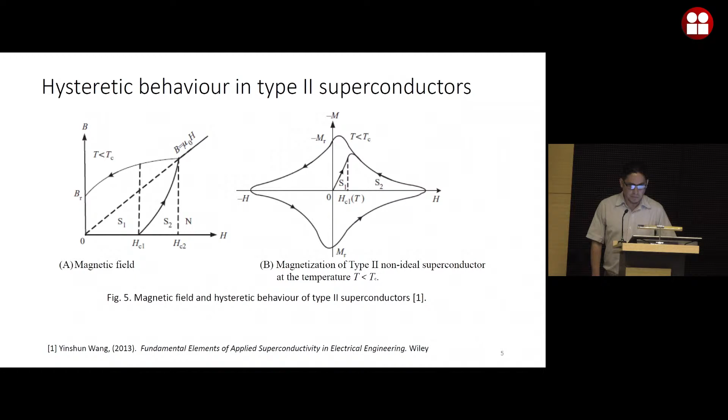You can talk, I think. It should work. Thank you, thank you.

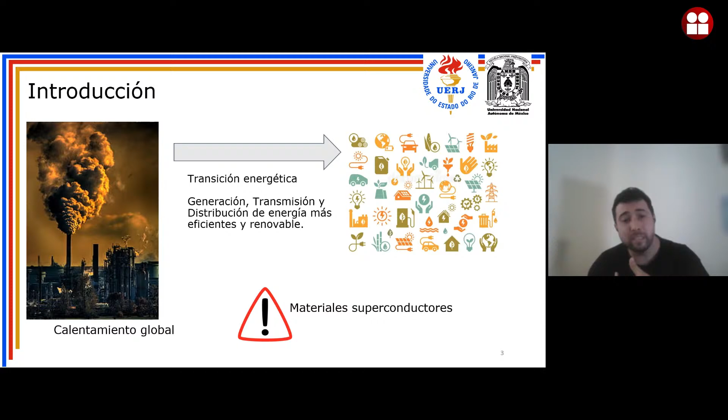Okay, so talking about global warming, we need to find some solutions to avoid these increases in temperature over the years. Including here in Brazil, we have experienced the highest temperatures in several years, so it's real, and we need to care about that. Our way to do that is the energy transition, and this energy transition is about the generation, transmission, and distribution systems, which we need to make more efficient and renewable. And here we insert superconducting materials as a potential solution to help this scenario. So we need to model them for these kinds of applications.

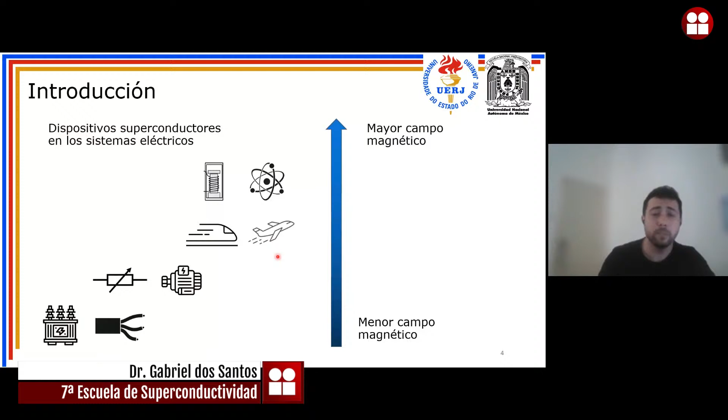For example, we can see some applications here: superconducting fault current limiters, transformers, cables, superconducting motors and generators, trains, aviation, superconducting magnetic systems, and fusion. In all of these systems we can implement superconducting materials in some parts of the device.

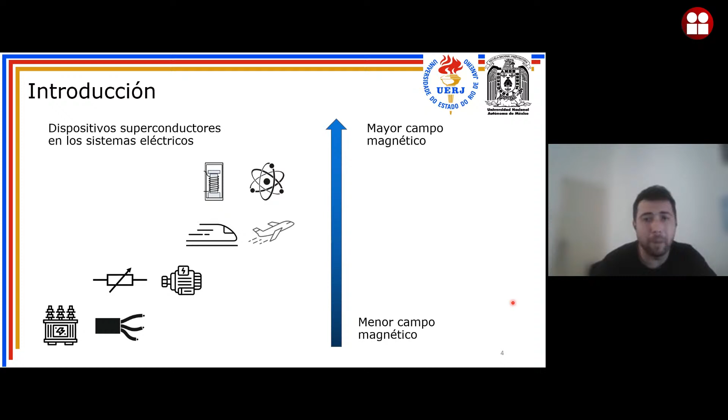And of course we have here a range of these superconducting applications in terms of the magnetic field, as we can see here. And the question is, how can we implement this kind of superconducting material? It has a very non-linear resistivity: it depends on the magnetic field, it depends on the temperature, and it depends on the current that we apply.

So the question is, how can we work with these materials, or how can we model these materials with their several nonlinearities and dependences? We have a solution here: solve this problem using the finite element method, moment method, finite difference methods and so on. It means the numerical methods that we can use to solve this problem and to design this kind of equipment.

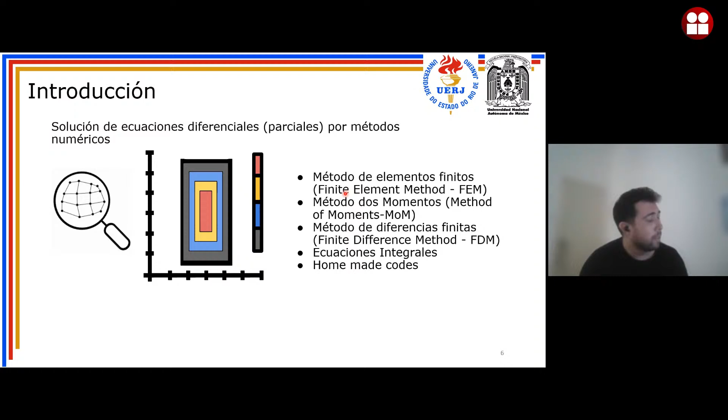So this kind of equipment needs to be simulated in some formulations. As the last presentations told us, we need to solve, for example, the A-V formulation, the H formulation. We can use the H-V formulation, H-A formulation, and so on. Here in this presentation, I will focus on the J-A formulation, a very recent formulation that was developed.

So here we are in the J-A formulation. The J-A formulation was proposed by me, by Professor Barbara, who works with me in the same university, by Professor Felipe Sass, Professor Flávio Martins, Guilherme Sotelo, and Rubens Andrade Jr.

In this formulation, we look at a low frequency system, and we solve a partial differential equation and an ordinary differential equation. Both these equations we can solve separately. It is important that we solve them separately. It's not the same system. It's two systems of equations that we need to solve simultaneously.

So we will solve here the magnetic vector potential, that is the state variable of the A formulation, that has as a source the current density. And for the J formulation, we have the current density as a state variable and the magnetic vector potential as a source. And we solve the ordinary differential equation.

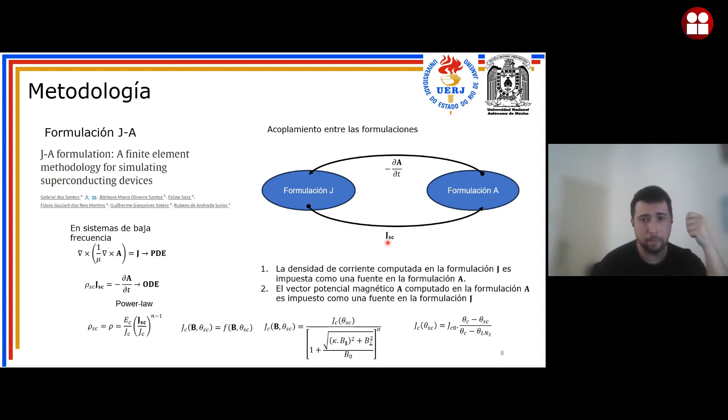And what about the coupling between these two formulations? We compute in the J formulation the current density. And this current density is imposed as a source in the A formulation. And we solve the A formulation and enforce the magnetic vector potential, better speaking, the time variation of the magnetic vector potential, in the J formulation. And so we make this enforcement in these two formulations, coupling them, okay?

And so as we know now how to model the J-A formulation, we could think how to impose or compute the induced current in some superconducting domain. So, for example, if we would like to impose a current in this domain here, omega SC, of course it's a 2D simulation, how could we do that?

So, in this case, we will integrate the current density through this domain and apply an integral restriction here. That means this integration minus the current that we would like to impose equals 0. And of course, we can make choices in several parts of this implementation. For example, we can choose to use or not a Lagrange multiplier. It's not needed, but we can choose it to help improve this method.

But the methodology to enforce the current is just to integrate the current density in the domain where you would like to enforce the current, minus the current that you would like to impose, equal to 0. We will see how to implement it in COMSOL as well.

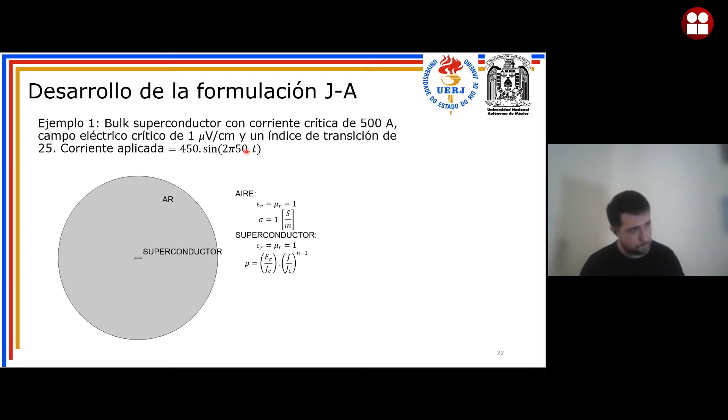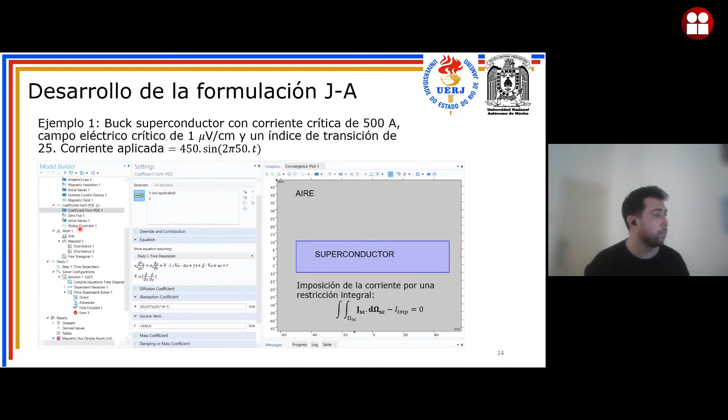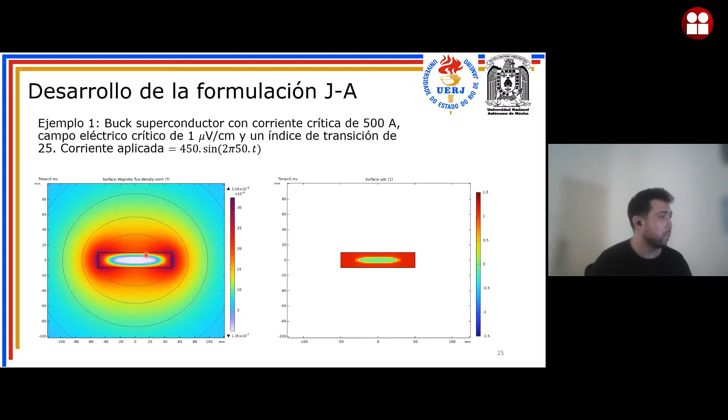in the last slides. We have the first results where we can see that the magnetic field and the current density show us the correct results as we expected for a superconductor. It means that the current in the superconductor has a correct form, as well as the magnetic flux density.

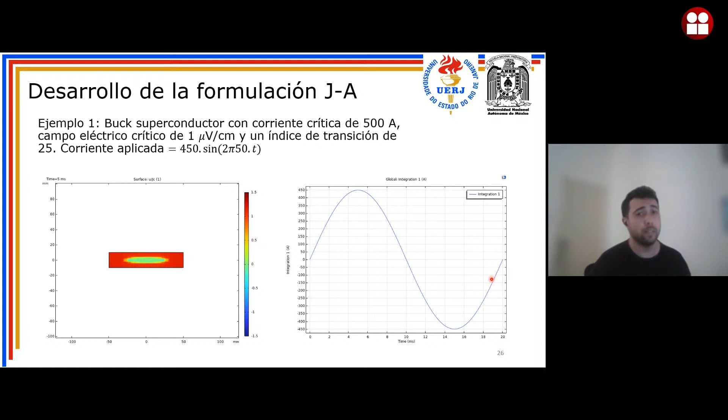And to check if the imposition of the current is correct, I integrate in another way this superconductor domain just to check if my imposition of the current is correct. And as we can see here, it's correct.

Now, computing the same problem with the same characteristics, just now imposing a magnetic field in the y direction, let's see the computation of the induction of the currents in the superconducting domain. We use here, of course, the Dirichlet boundary condition to impose the magnetic field in the boundary here.

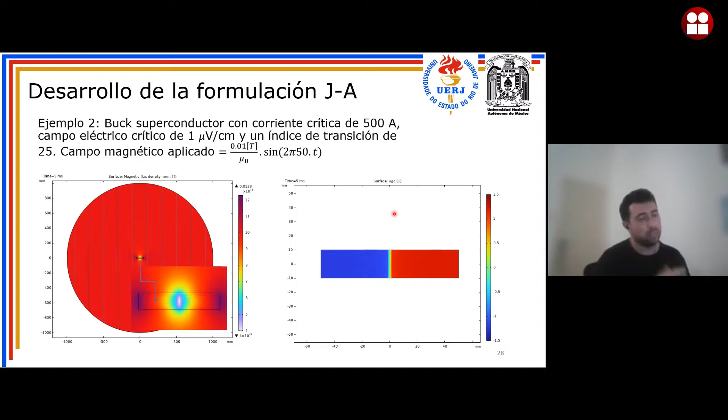And so, as we can see here, the superconductor has a correct current density. The current is inside of the plane and outside of the plane. It indicates a circulation of the currents to avoid the penetration of the magnetic field inside the superconductor. Of course, in this case, as this value of the magnetic field was so high, the current penetrated a lot in the superconducting domain.

Now, I would like just to emphasize the two publications that I could see in the literature about the J-A formulation. The first publication was done by me, Barbara, Felipe, Flávio, Guilherme, and Professor Rubens, and a very nice publication as well, the numerical calculation of a high temperature superconductor with J-A formulation that was developed by Silhan Wang et al. It was also published in 2023.

So, as a conclusion, here was presented a new formulation, and this formulation has a high potential to accelerate the computation times, including considering ferromagnetic materials. There are open opportunities to implement MgB2 problems in J-A formulation and also to contribute in the homogenized method approximation. I also would like to see some implementations in this field. As I told you, this formulation gives a possibility to implement superconducting ferromagnetic materials and so on.

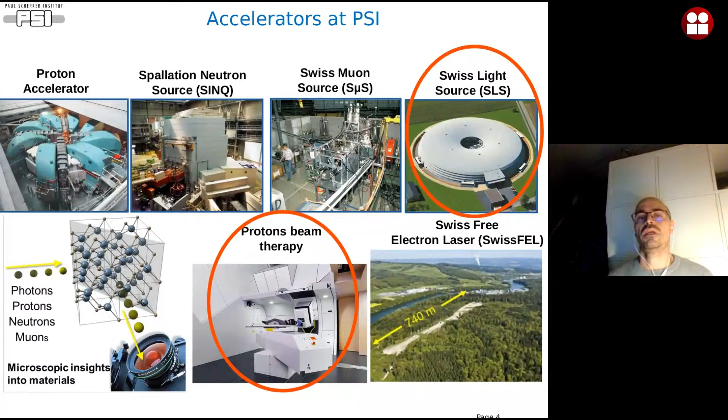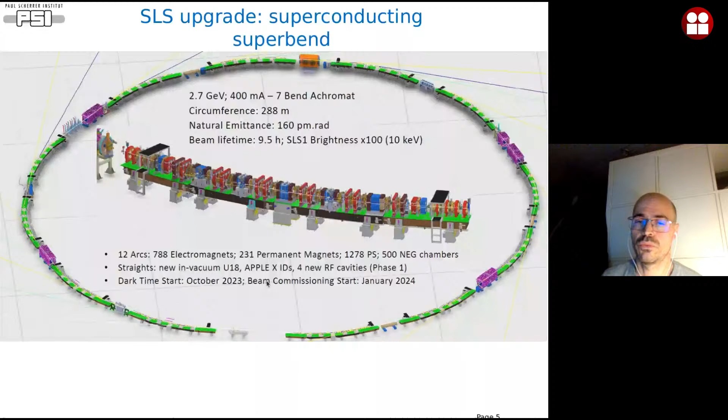So I start with the upgrade of the Swiss Light Source, our electron accelerator at PSI. For this upgrade, we need to replace all the storage ring, and we needed to design, build and measure more than 1,000 magnets, including resistive electromagnets, permanent magnets, and 2 superconducting magnets. Here is just an overview of our zoo of magnets.

On the top row we have permanent magnets. You can see an example of a dipole. This is a combined function, dipole and quadrupole. This is a so-called superbend, which is a dipole with a longitudinal gradient, which will be used in our storage ring to produce hard X-rays. A quadrupole made with permanent magnets, and then here you can see classical resistive magnets. A quadrupole, a sextupole, and this is an octupole by itself, but actually we use it as a combined function octupole, quadrupole, and skew quadrupole.

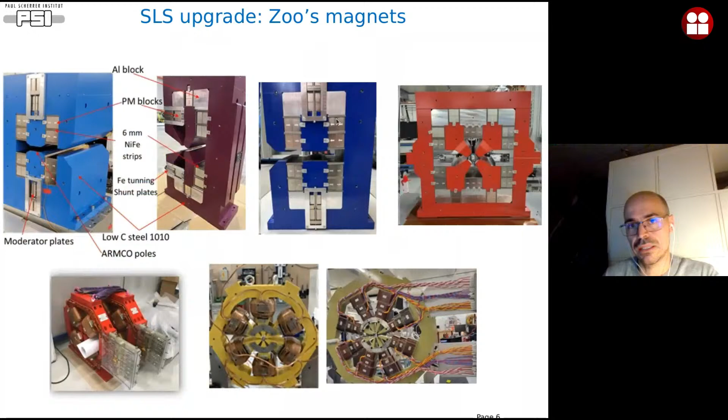That has to be a cryogen-free or almost cryogen-free magnet, because it was not convenient to build an infrastructure to have liquid helium and liquid nitrogen for the screen flowing all around the tunnel just for 2 magnets. So it's a magnet that relies on cryocoolers. This will be used for phase 2 of our project, but this magnet is already in production.

Whereas when you irradiate with electrons or with photons, with X-rays, the peak of the dose is actually at the surface of the patient himself or herself. Proton therapy has a lot of advantages, especially in the case of kids, where surrounding tissues are more delicate and where the risk of secondary tumors is higher.

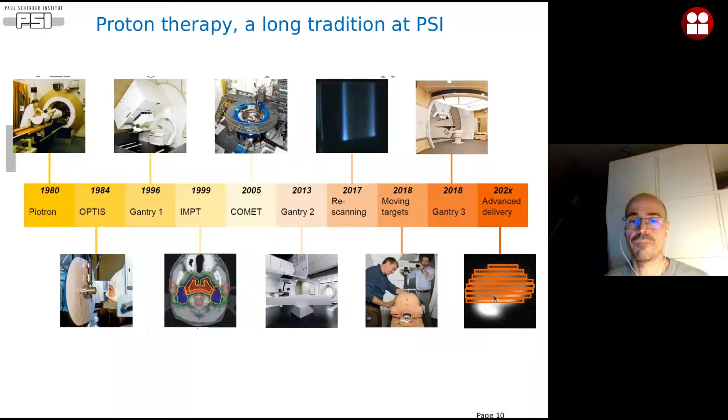Then in the early 2000s we got a dedicated superconducting cyclotron for the proton beam lines. And in the first decades of the 2000s we got our main machine, which is Gantry 2, and we really developed this rescanning technique, which allows us to scan the tumor and deposit the energy exactly where you want, and also to repaint, so to redeposit energy if the required dose to kill the tumor exceeds certain thresholds.

I want to point out, in terms of pioneering projects, that already in 1980 there was this project that was not built, but it was still nice to conceive. It was a machine called the Piotron, already involving superconducting coils. Here there was a set of superconducting coils based on niobium-titanium to confine the pions, and here was the bed with the patient.

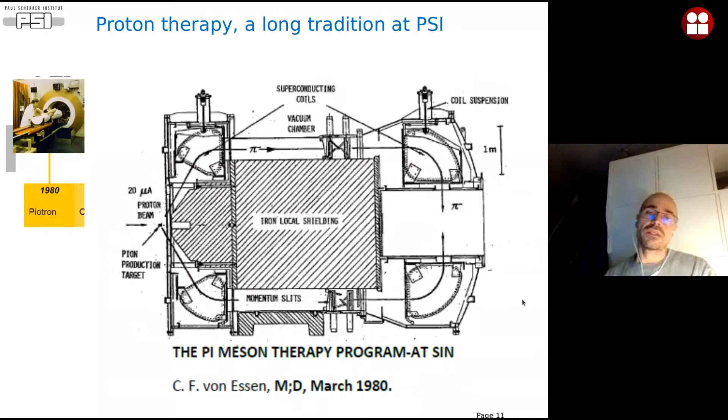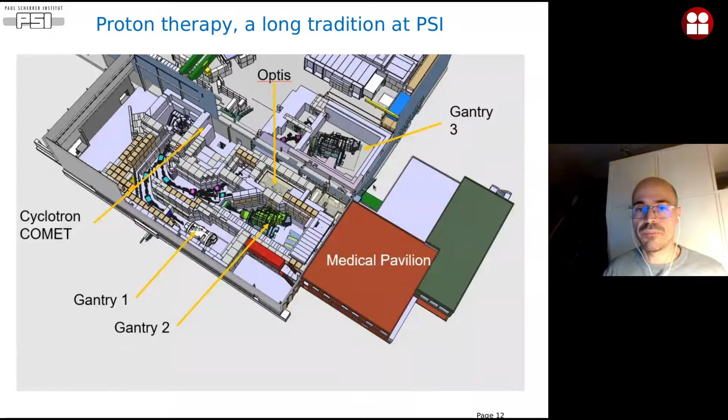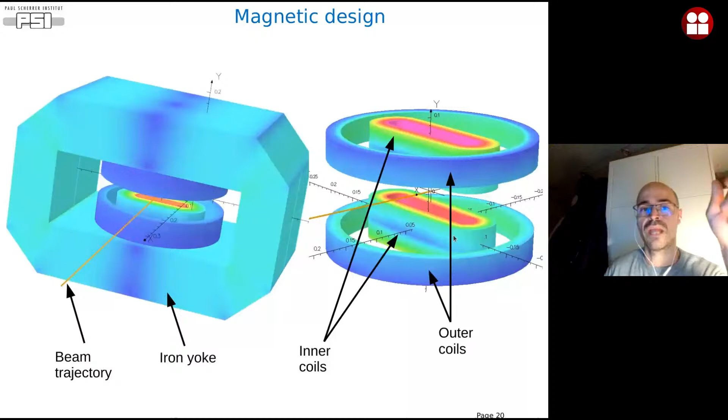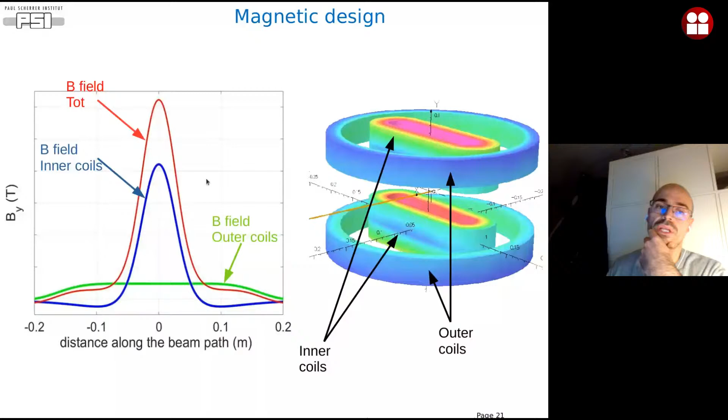You have a set of basically two solenoids outside just to guarantee the field integral that you need, and then actually you have two racetracks inside to boost the field and to produce a peak like that. So here you can see basically the background field produced by the outer coils, the outer solenoids, and then here in blue you can see the field produced by the racetrack, which is actually the peak field that you need to produce hard X-rays in the storage ring.

As I told you, the beam physicists told us that they require the tunability. So actually, you can change the current setting in the coils in order to have different peak fields by keeping this field integral always constant. And this had some implications, especially for the thermal design, because of course to have the possibility to tune the current in the racetrack and in the solenoid, you need two power supplies, you need two sets of current leads, so you have a bit more thermal input.

Challenges when we deal with magnets that have to stay in a storage ring with another 1,000 magnets in the same ring: it's of course the crosstalk. So actually it was quite a big part of the magnetic design, the study of the leaking field or the stray field of this magnet. We were also studying a different configuration for this, like an H-frame or a C-shaped magnet, and of course mechanical

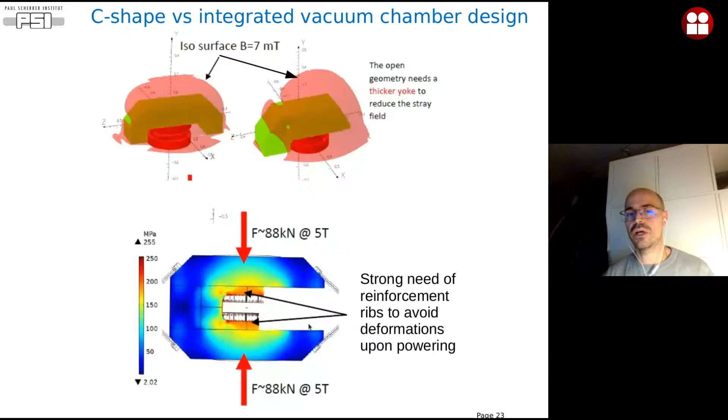stability, because at the end we are sensitive to mechanical errors. So if these forces would actually tilt the coils too much, you would introduce harmonics in your field which then you cannot correct in the storage ring, and so at the end the optics of your storage ring won't work. We did analysis to check the impact of the roll, yaw, and pitch angle on the magnetic field, because in reality we will have alignment errors, which didn't show, let's say, showstoppers in this phase here.

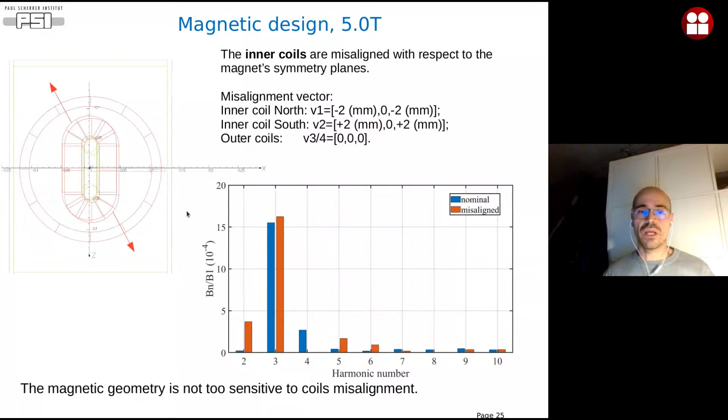Also, we analyzed the problem of misalignments of the coils, because again we had to deal with mechanical tolerances in a mechanical assembly. And also here, by studying the harmonic contents, we saw that indeed we are not so sensitive to these coil misalignments.

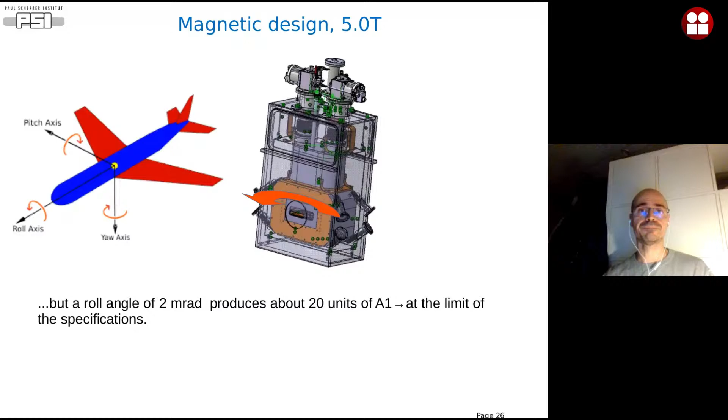But the challenge is really in the suspension straps here, because if we have a small roll angle here, we are talking about basically 2 millirad, this 2 millirad translates into 20 units of A1. A1 means a skew dipole. So the normal dipole is going vertically in this direction. The skew dipole is orthogonal to that, and this is basically at the limit of what we can correct in the machine. So just to give you an idea about the tolerances that we have to achieve in the storage ring.

As I told you, the crosstalk is actually an issue, it's a challenge. When we design every magnet, also the resistive and the permanent magnets, we cannot design the magnet one by one as a standalone magnet. We have basically to check the impact of the neighboring magnets.

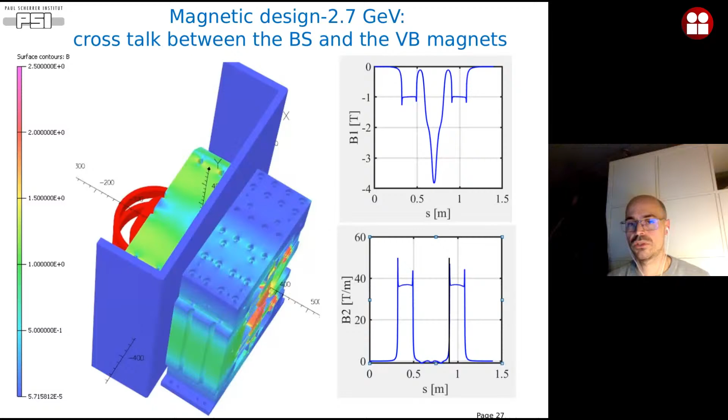So in this case, you can see a magnetic model of the superconducting superbend, including also the cryostat walls. And here is actually a permanent magnet, which is a combined function dipole and quadrupole. So this is the profile of the B1, the dipole component along the beam path, and the B2, the quadrupole component along the beam path. So just to say, in this particular case of the storage ring, the crosstalk is an issue, and whenever you design a magnet, you need to take into account also the neighboring magnets.

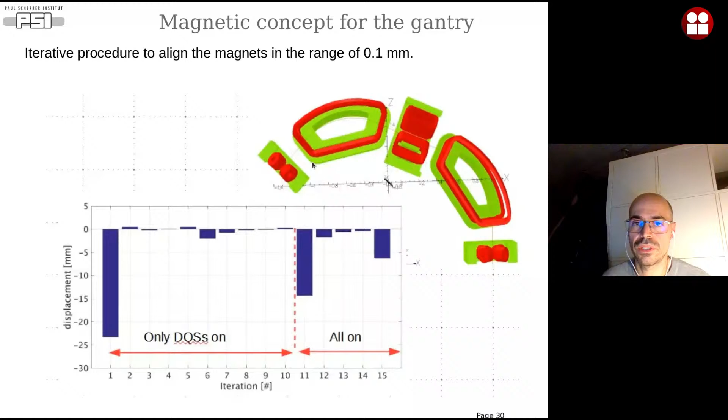So you need to change the field of your magnets, and you have to be quick, because on the other side of the magnet the patient is waiting, and the treatment itself cannot last long. Also because sometimes we have moving tumors, because the patients have to breathe, and there is the heartbeat. The tumors are not really static objects, so you have to change the field quickly. And so there is the problem of designing a magnet to minimize the AC losses.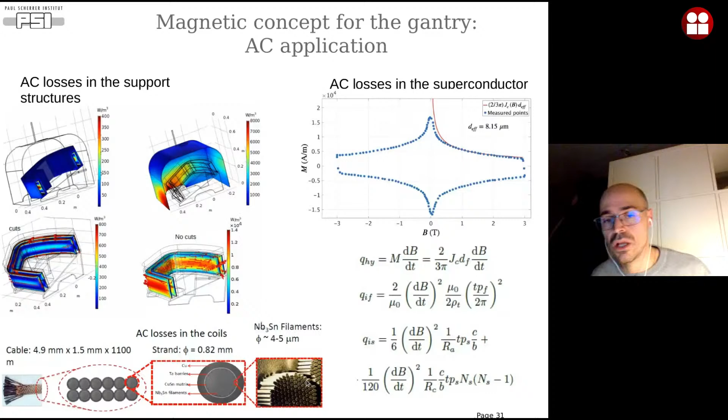And if you look inside a cable, you have interstrand losses. When you ramp the field up and down, the current flows between the strands. Inside the single strands, the current also flows among the filaments, so you have interfilament coupling losses. So it's really a multi-scale problem, and you have to go from the losses in the big support structure to the interfilament losses inside the superconductor. All this will then have an impact on the thermal design.

We start, as before, with the superconducting superbend. In this case, the magnet is a steady-state magnet, so the problem of AC losses is really minimized, because you have to change field just when you turn on the magnet, and you can ramp the current very smoothly. Here you can see a schematic of the superbend. It relies on two cryocoolers for redundancy. The machine has to work with a reliability of almost 99.999%, and if the superbend fails, you have to shut down the whole storage ring. That's not acceptable, or we have to minimize this risk.

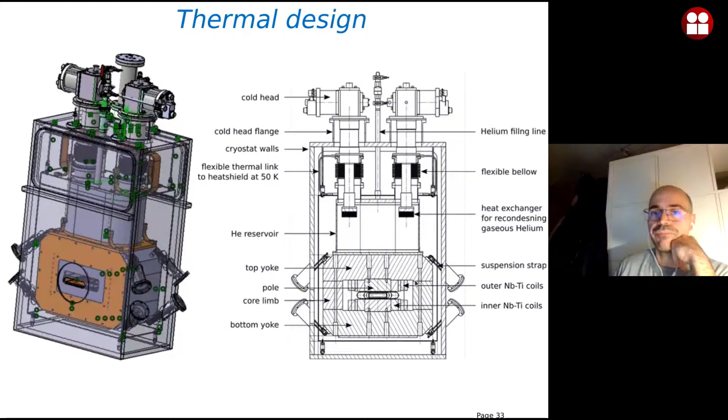In our previous design, we also had a helium reservoir with the idea of using the cryocoolers as recondensing units. This was also to get a better contact between the 4.2 Kelvin surface and the yoke. And then the coils located here are cooled by conduction. The challenge here was the design of the copper straps, so the thermal path between the cryocooler and the coils.

Basically, we are going to use two-stage cryocoolers, because we need to cool down the shield, because there is a thermal shield here which has to stay at 50-60 Kelvin, and then we have to cool down the cold mass, which has to stay at 4 Kelvin.

With our design, we can also cool down the magnet by pouring liquid helium in this reservoir, or directly by conduction, thanks to the cryocoolers, which otherwise work as a recondensing unit.

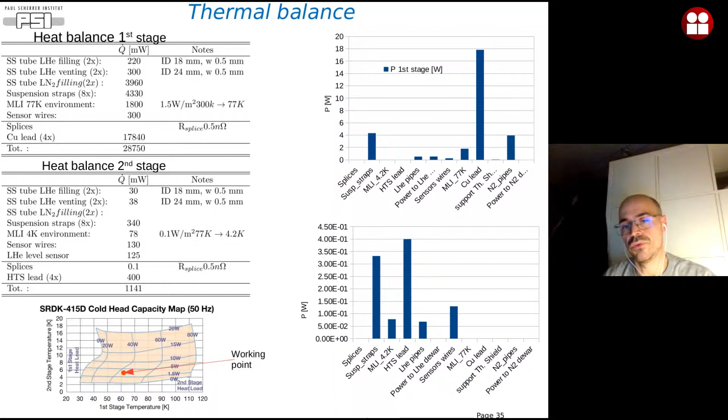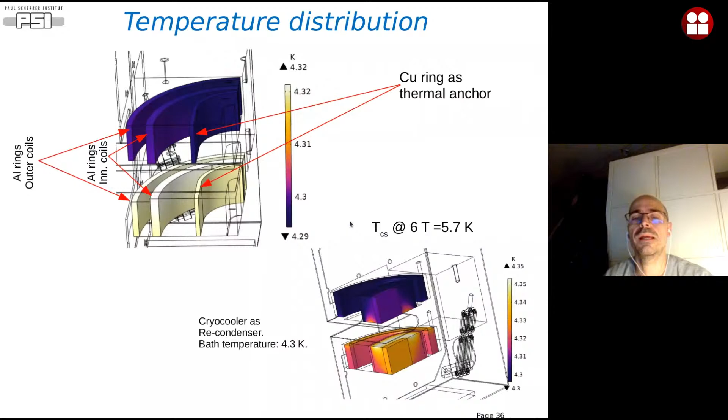We put quite an effort to design the thermomechanical structure around the coil. We needed a structure here to pre-compress the coils. And the point was also to try to use this structure as a heat path, so to have a homogeneous temperature distribution in the coils. So here you can see the aluminum ring which goes around the outer coil, the outer solenoid, and then this is the support structure of the racetrack inside.

And also, the challenge was to minimize the heat gradient in the shield and in the suspension straps. So these are the suspension straps which go from the cold mass to the cryostat. From here you have 300 Kelvin, and then here you have to stay at 4 Kelvin. So you have to minimize the heat load coming from the suspension strap.

And the main point here was to clamp the middle point of the suspension straps to the thermal screen around, just to intercept most of the heat coming from the 300 Kelvin environment.

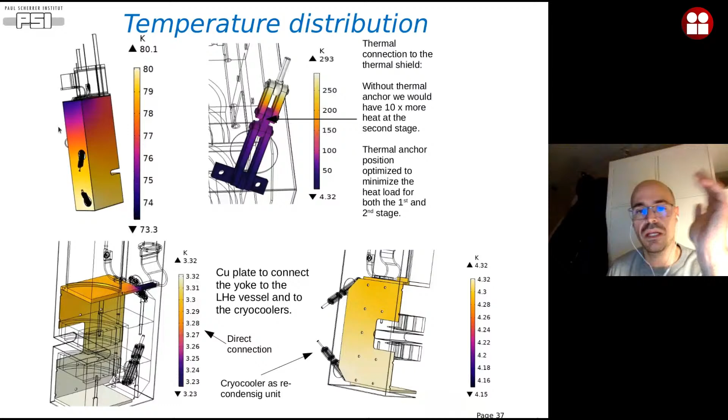If we switch back to the gantry, in the thermal design, a lot of problems were the same as for the superbend: minimizing heat load coming from the straps, the radiation from the screen and so on. But in the gantry, the additional challenge was the fact that we have to work in AC.

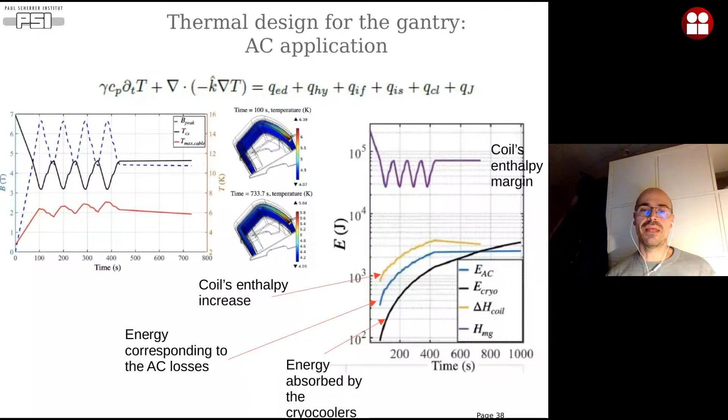And the field of this sweep actually was not decided by us, but it's an input that comes from the medical physicists that have to analyze how fast you need to sweep the field in order to treat the tumor. So how fast you need to scan the tumor in depth.

If we go to the mechanical design now, as I mentioned before, we try to use the mechanical structure also to distribute the heat in the coils. So the support structure of the SuperBend relies on pre-compression rings. For the outer solenoid, it's pretty simple. It's really a compression ring.

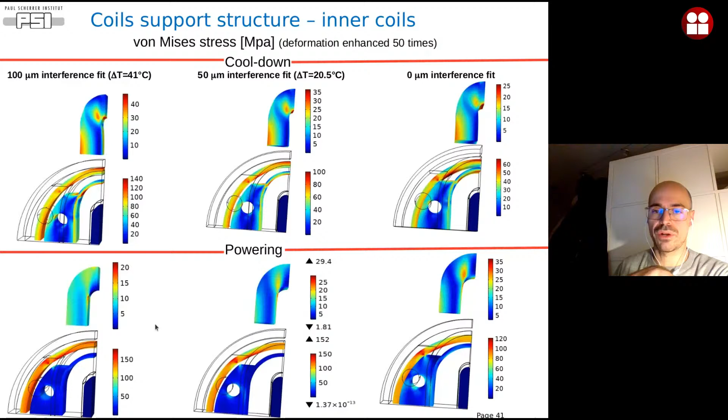The other point was to consider the full structure around the coils. For instance, we have to screw the pads, so it was important to consider the friction between the screws and the supports. The friction had to be minimized, because you want these pads to move when the aluminum ring around shrinks, and you don't want to lose much pre-compression as a consequence of this friction here.

All these problems are highly nonlinear, because you have to design the contacts between the various parts of the support structure. And in this particular case, I was using again COMSOL to make this multi-physics coupling between the magnetic design and the mechanical design.

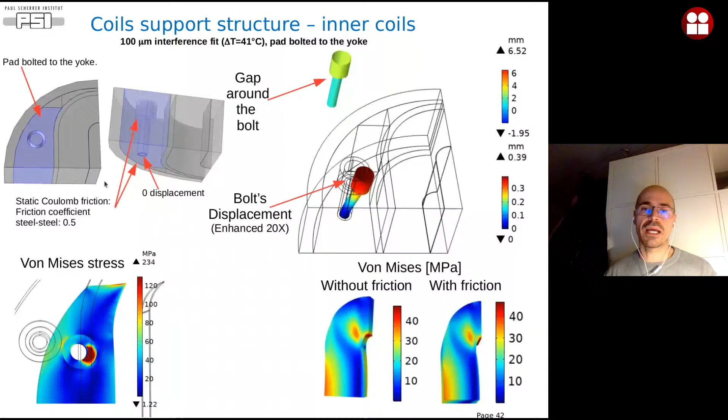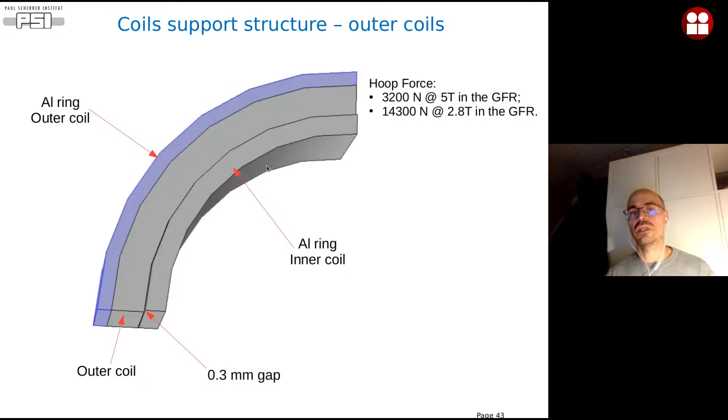Okay, for the external coil, the concept is the same, but it's actually easier because we just need an aluminum ring to pre-compress the inner coil. For solenoids, the design of the mechanical structure is usually much easier. So here you can see the same kind of calculation, just something to counteract the hoop stress action. The SuperBend is made with niobium-titanium, and niobium-titanium is not strain sensitive.

For the gantry magnet, the additional challenge was AC losses, as we said before, but we wanted to use Nb3Sn, because with niobium-titanium we didn't have enough margin. HTS at the time was too expensive, so we didn't select HTS. So Nb3Sn was the conductor of choice. The additional challenge is that Nb3Sn is brittle, and on top of that strain sensitive. So you have to make an effort to minimize the deformation, and you don't want to crack your strands inside the cable.

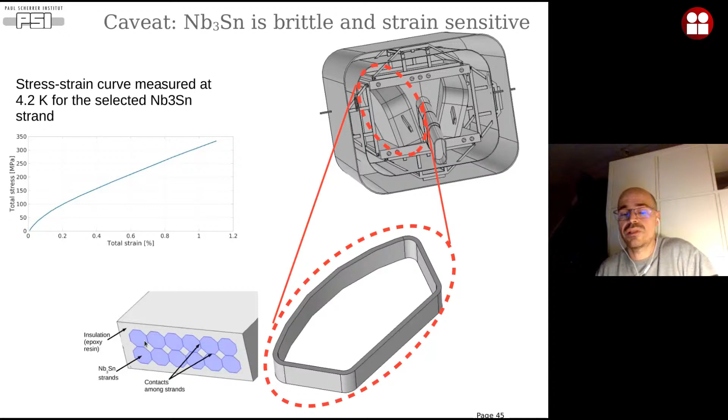For this magnet, we plan to use Rutherford cables. Here is a simplified cross-section. It was a small Rutherford cable made of 12 strands. And this is the stress-strain curve of one single strand, the curve that we use for the mechanical calculation to estimate the strain and then the stress inside the cable.

Also here, it was a multi-scale approach, starting from a homogenized model of the coil, going through a homogenized model of a cable inside the coil, to go to a twist pitch of the Rutherford cable inside the coil. The idea was to calculate the strain inside the strands, and then, using the behavior of Jc against the strain, you can estimate where you land here, and so you can estimate your quench margin.

Indeed, with the multi-scale approach, you can go also further, because if you select the strand where you have the peak stress, then you can go deeper into the analysis, and you can see actually what happened in the strand itself among the superconducting filaments. So this is basically the strand. This was the non-deformed configuration. Then you can see actually the real strain, or in this case the stress distribution in the superconductor, in this case Nb3Sn filaments.

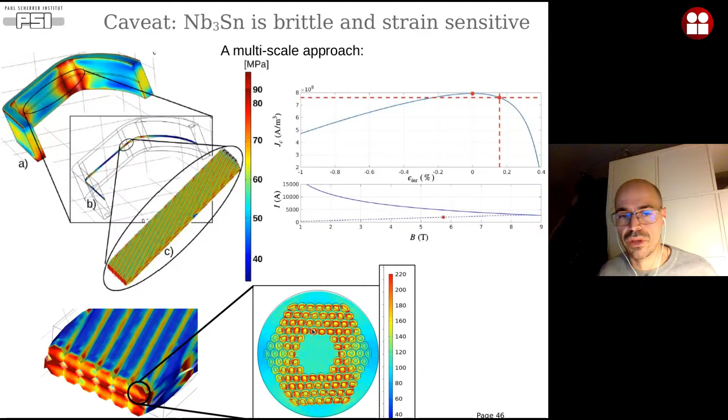Quench, well, we said it's a multi-physics problem, and quench indeed is a multi-physics problem. The quench protection for both the superbend and the gantry magnet is a classical one. It relies on an external dump resistor. So whenever we overcome a certain voltage threshold, and we overcome this threshold for longer than a certain validation time, we need to dump the energy of the magnet into an external dump resistor.

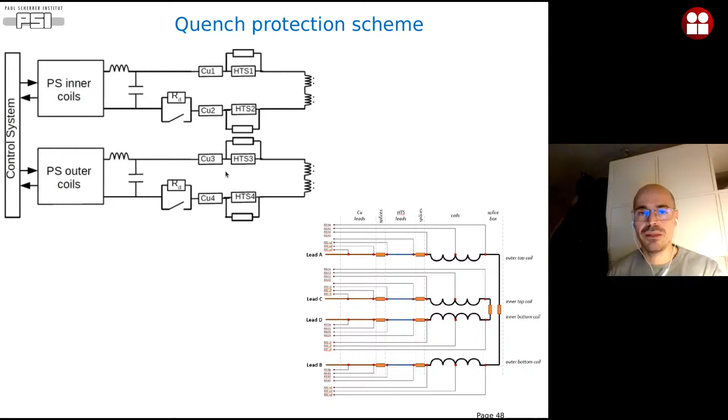It was very helpful to produce this sort of maps. So this was the damping constant of the outer coils and the damping constant of the inner coils, taking into account the inductive coupling between these two sets of coils. Because once you have this map, you can see in which region you want to stay, and you can select the dump resistor you need. The point was to have a hotspot temperature not that high, but on the other side, you don't want to have more than 1 kilovolt of voltage, because then the insulation becomes more cumbersome. So this was the trade-off: minimizing the hotspot temperature, but also the voltage for both the outer and the inner coil.

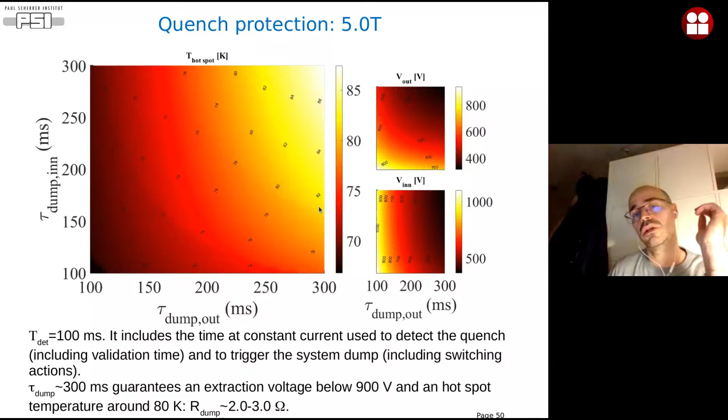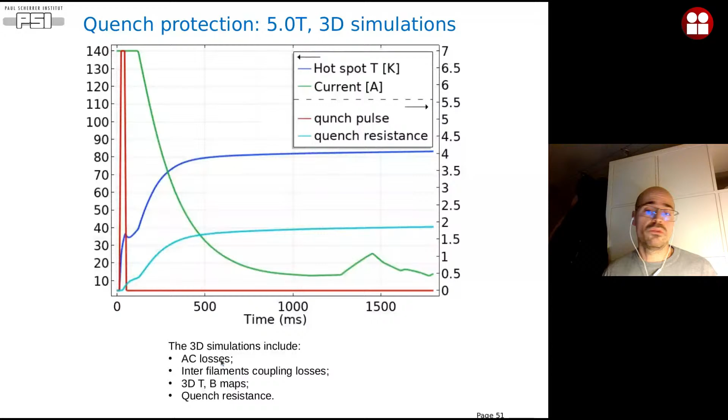We did some 3D simulation, because these maps were a very nice tool, but of course it was basically an analytical calculation. Then we checked with a COMSOL 3D model, where we could also plug in the AC losses, because when you dump the current, you have a dB/dt, which produces AC losses. We needed to estimate the role of the interfilament coupling losses, and to see how the quench develops in the magnet.

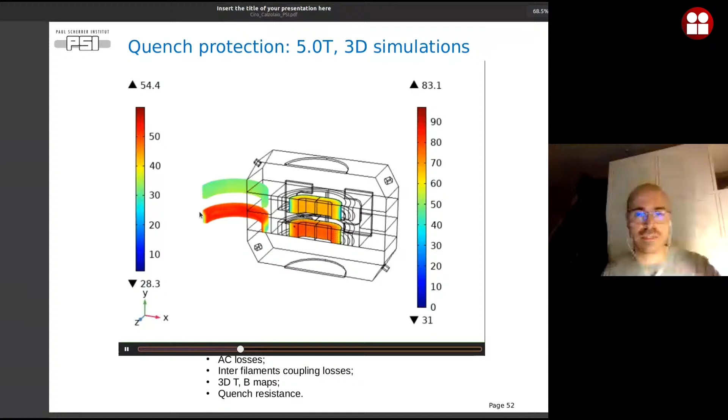I have here a small video. I don't know if you can see it. It shows you the evolution of the quench. The idea was to trigger a quench in the inner coil, and then you can see that as a consequence of the currents induced in all the structure in the magnet, after a few milliseconds you quench also the other coils. Here, for the sake of clarity, I plotted the outer coils far apart, but of course the coils are concentric. Basically you start quenching the inner coil, then you induce eddy currents everywhere during the discharge, and you quench the full magnet.

But the good point was that the hotspot temperature was not going more than 100 Kelvin or so. So we feel safe from this point.

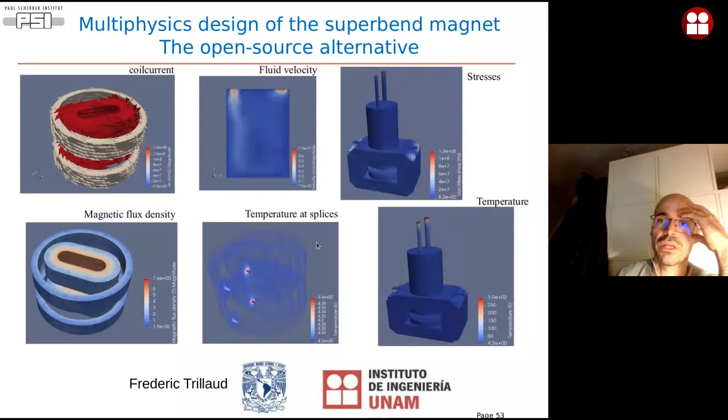Another very nice thing I want to mention, in the frame of the superbend superconducting magnet, is a nice collaboration I have with Professor Trillaud. For all the models I was showing you, I was using COMSOL, whereas Frederic is developing all these tools in Elmer to simulate the different aspects we require for the design of the superbend using open source alternatives. I'm showing you some of the plots Frederic showed when he came to our institute last year. I wanted to stress this nice job by Frederic and this collaboration to look for open source alternatives to COMSOL or other commercial software.

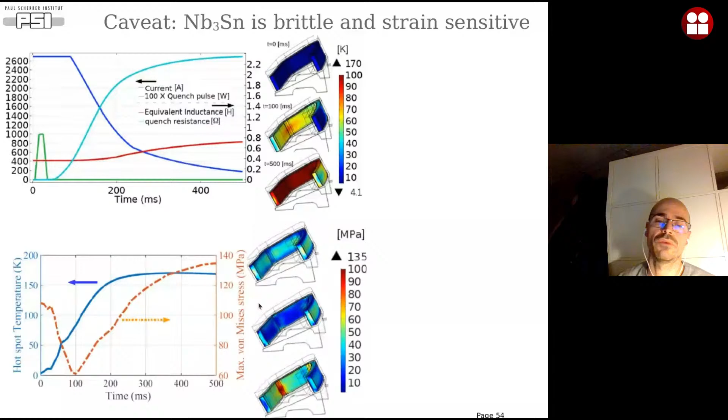If we talk about quench, as I said, for the gantry magnet it's the same principle. So we have an external dump resistor, but there is a caveat. The gantry magnet, as I told you already, is Nb3Sn, so it's brittle and strain sensitive. Therefore, when you do this quench, you have to also take care about how the stress in the coil evolves. And here you can see basically the evolution of the stress in the coil during the quench discharge and during the evolution of the temperature.

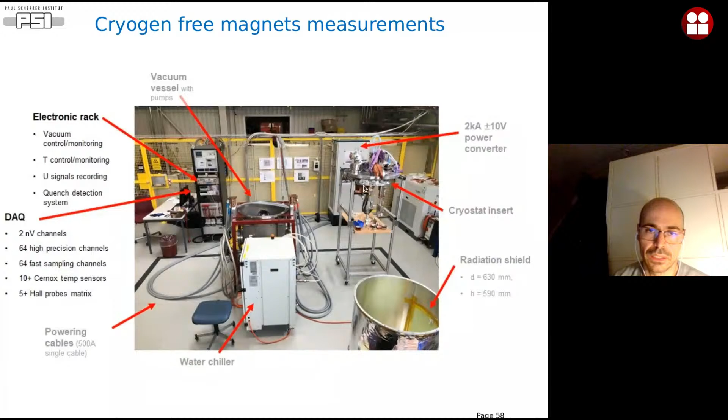And another project that we are working on is about a superconducting shield. In this case, we want to use a high-temperature superconductor, and this is in the frame of an experiment that we want to perform at PSI to look for the electric dipole moment of the muons. So the idea would be to have a solenoid where you let your muons spiral, but the physicists need here an injection channel at zero field. So you have to screen the fringe field coming from the solenoid.

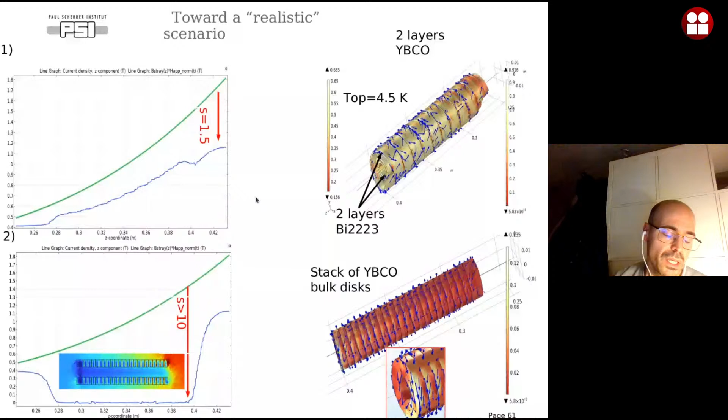In this case, again with COMSOL, I was using this A-H coupling to simulate the shield, to estimate the screening factor that we might have with different configurations of shield. One of these was the shield made with YBCO tapes, and one, which is actually the most promising, is the case with YBCO bulks, so an array of bulks. This project is in an early stage, but we try to go ahead with that as well. So I hope I could give you an overview about some projects that we have at PSI.

We have at PSI the challenge, but also the big chance, to deal with different accelerators. And for these accelerators, we deal with permanent magnets, room temperature electromagnets, and superconducting magnets. And of course, as you know, the design of a magnet, in particular a superconducting magnet, is really a multi-physics problem, which makes things really interesting in my eyes.

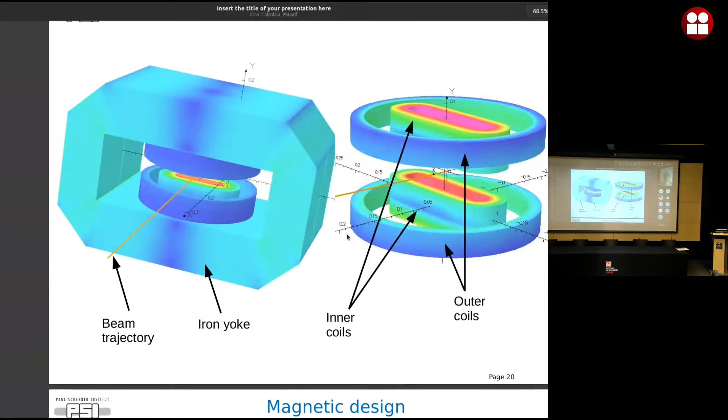Very interesting presentation. Could you explain in more specific terms what are the advantages of using the racetrack coil inside the solenoid? I saw that you use that in order to get higher magnetic fields, but are there other advantages? Yes. So basically, you mean this one, right? Yes. So basically, if you just use the solenoids here, you will have a bell-shaped

field. We need to use this magnet to produce hard X-rays. The thinner the field profile here, the smaller the bending radius seen by the electrons, and the higher the energy of these X-rays. We need to produce hard X-rays, so we need an abrupt change of trajectory for the electrons. For this reason, we need to boost the field in the middle in order to have this peculiar profile.

With a bell-shaped profile, at the end of the day, you reduce the performance of your machine. So that was the main issue. And this was the reason why we need to concentrate the flux lines with racetracks to boost the field really in the middle. Otherwise, you end up with a bell-shaped profile. Okay, so it was a requirement for the production of X-rays, indeed. You are playing with the inductance. I see. Well, it's not inductance.

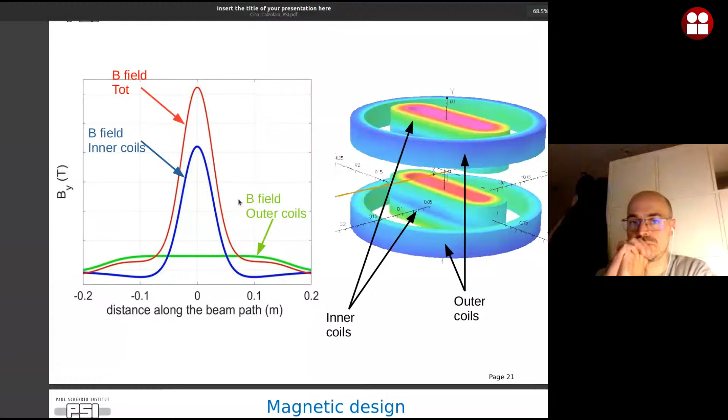Firstly, congratulations for your presentation, Ciro. It's a very nice presentation.

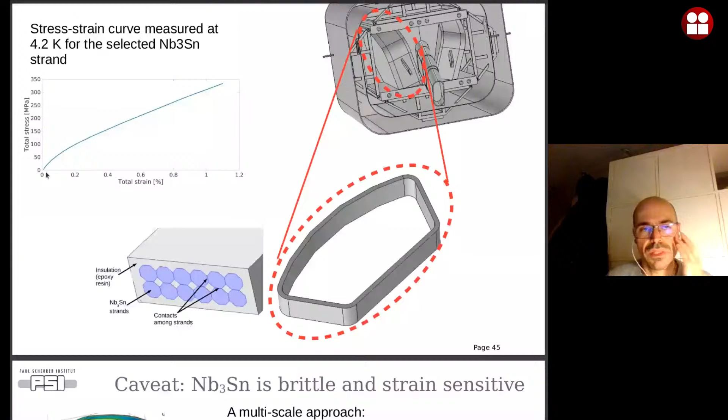And in the sub model I was importing the displacement. Of course, here you don't have any friction; this one is a pure elastic model. In this one instead, where we input the displacement, because the scale of the problem is smaller, we could use the elastoplastic behavior of the strand. I had a stress strain curve that I measured at 4.2 Kelvin, so I could plug into this model the stress strain of the Nb3Sn strand, and I could also simulate the contact and friction between the strands.

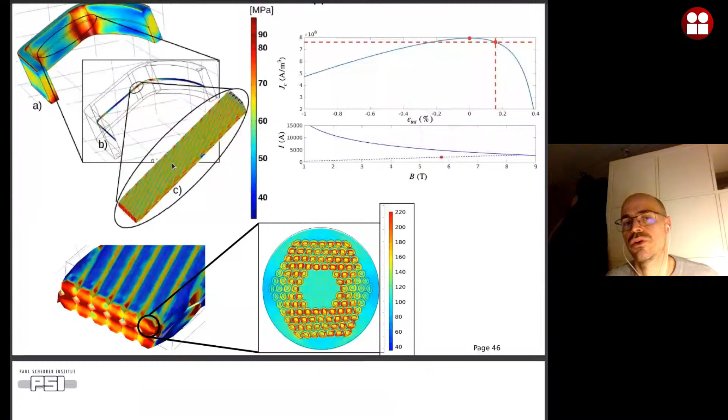And this, I have to be honest, was already enough to evaluate the margin you have. But then you can go further, because with this approach you can go down in scale. Once you have the displacement in this model, you can apply it to a zoom in the strand. But for the design of the magnet, these 3 steps were enough, because you have the JC versus strain and versus field measured on the full strand. This one was really to go into the structure of the strands, collaborating with the company producing the strand, to see if we could improve the architecture of the strands.

But I don't think that this step is necessary for the magnet design if you rely on a strand that you buy. If you are also developing the strand itself, it's another approach, and CERN is doing that. I was doing that when collaborating with CERN, because they need to boost the research in the conductor itself. But this was the process, and here was the displacement coupling between the homogenized model and the detailed model, which is elastoplastic.